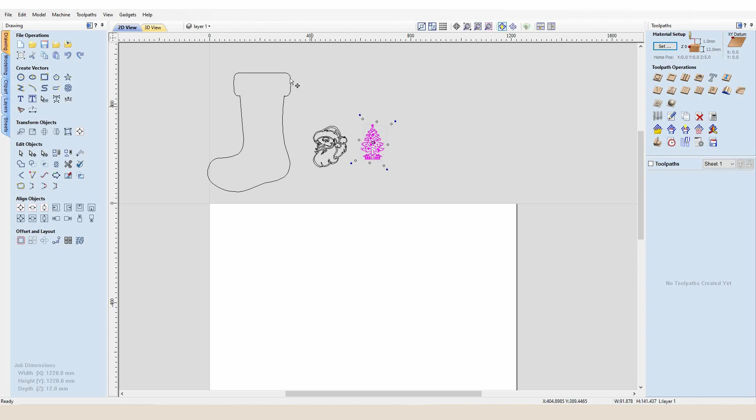So as we open the file here, I've got some vectors that we intend to use today. So I'm just going to spend a second and bring those in. Okay, so these are the three vectors that we're going to be working from. So the first vector is a Christmas boot shape. So if I bring this down here, now the first thing we're going to do is hold Control on the keyboard and press C followed by V. And we're going to copy and paste that across to there. And one will form as the front. And as I just mirror this object horizontally, one will then function as the back.

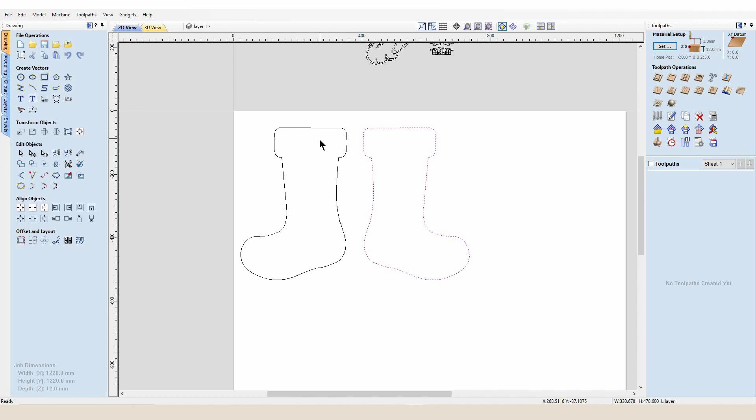Okay, so I'm going to add a nice line vector across here. And we'll quickly form then our first tool path. So if I select this vector here to make our first tool path, what we're going to have is a 2 millimeter deep V-groove line, and we're going to choose a 60-degree bit for that just to give us a nice fine crisp line, and we're going to cut just on the line itself. And as you can see, once our boot is finished, that's going to give us that little detail to divide between the top cushion part and the boot itself.

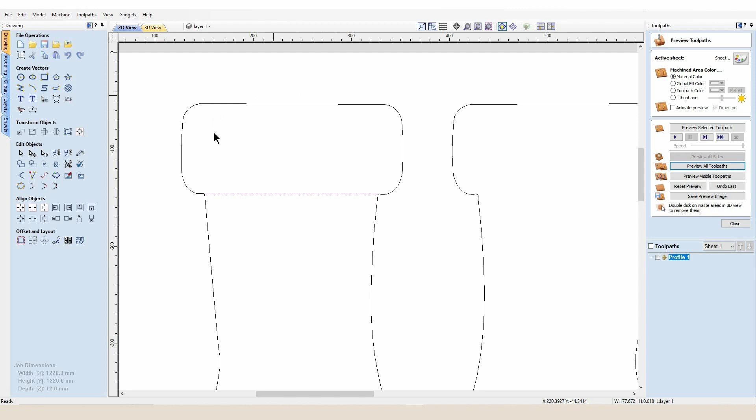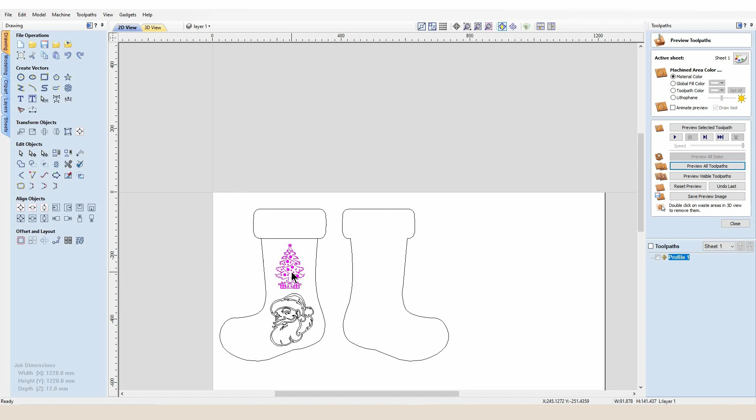Okay, so the next thing we're going to look at is our Happy Santa face. If I bring this one down here, we're going to position this approximately here on our boot, and then I'm going to bring this happy little Christmas tree down, and again, we're just going to spend a little bit of time orientating these to get them exactly where we want them. And that looks to be quite well centered. I would just like to tweak that over a little bit so it runs in line with the boot itself. Okay, so that's the front aspect of our boot.

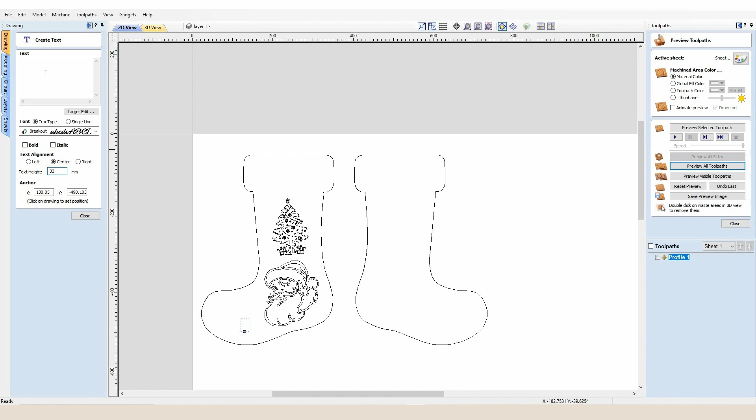I'm going to quickly add some font to this, and we're here already on Breakout, which is one of my favorite fonts. We're going to go a text height of 33 millimeters, and we're going to say Merry and then Christmas. Okay, so I'm going to bring that up and centralize it over the top of our stocking. And again, what I'm looking at is this line down here and this line down here to make sure we're somewhere near parallel to both those lines. So that's not too bad.

And again, just to make this into a finished text shape, if we come over here to our weld selected vectors option, and if we press that and replace those, we've done away with all those small inside vectors overlapping, which sometimes can cause issues when you're trying to run your tool paths. So just going to spend a second and tweak this little tree up a little bit. There we go. I'm quite happy with the orientation on that.

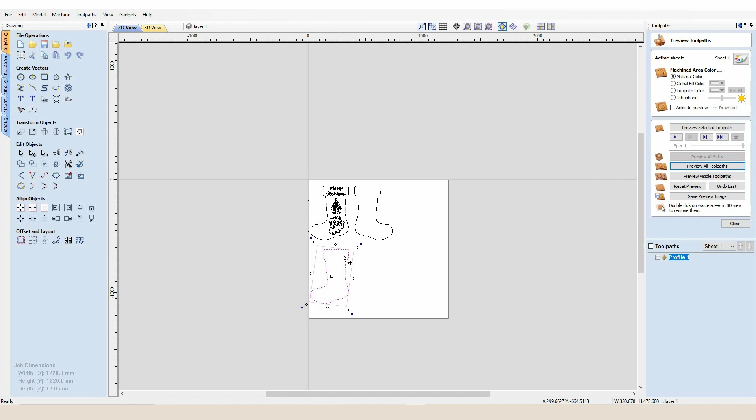So what we're going to do now is move on, and we're going to build some inner parts to this boot, which is effectively going to create a cavity for you to fill with all those nice sweets. So if I just pinch this outside vector and hold Control, press C and then V, we've made another carbon copy. And I'm going to bring that down here over to our stock, and I'm going to add an offset boundary on the inside. I would like my offset boundary to be 20 millimeters, and we're going to go inwards, and that is perfect.

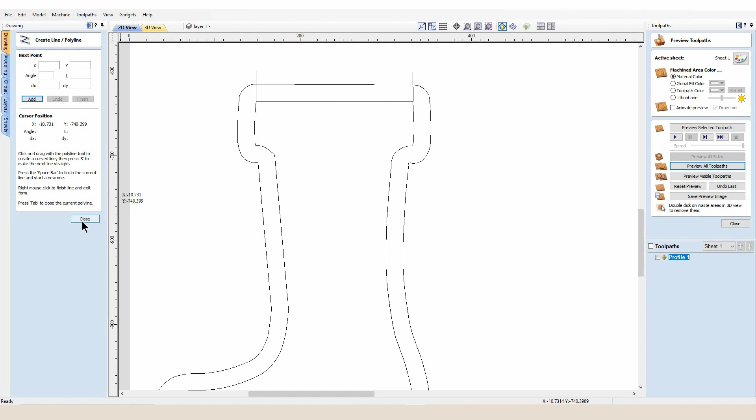Okay, from this step here, I'm going to draw a straight line, and I'm going to pick up this vector here, and we'll drop it there. Press space to start a new line. We're going to start from this corner here, and we're going to work our way upwards. Remember again, press space. So we use the magic scissors now, and we're going to snip the internal away. So I'm just going to make sure our lines are correctly orientated over our project. And as you can see, the Smart Snap features are asking it to move into some funny locations. So that should be enough there.

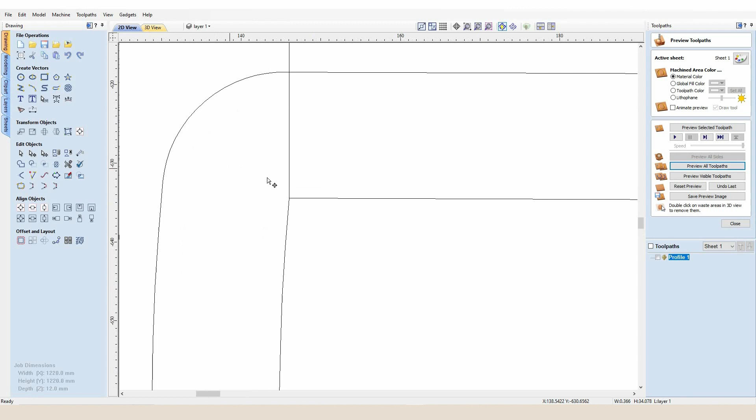We'll just double check this vector. That looks pretty good. So now if we get our magic scissors, we can snip this line, and then we can snip the remnants of these two lines away. And what we've got now is a template for the inside cavity. So our stock for this project being 12 mil, we're going to simply make another 2 of these. Okay, so that's all the main body parts for our stocking.

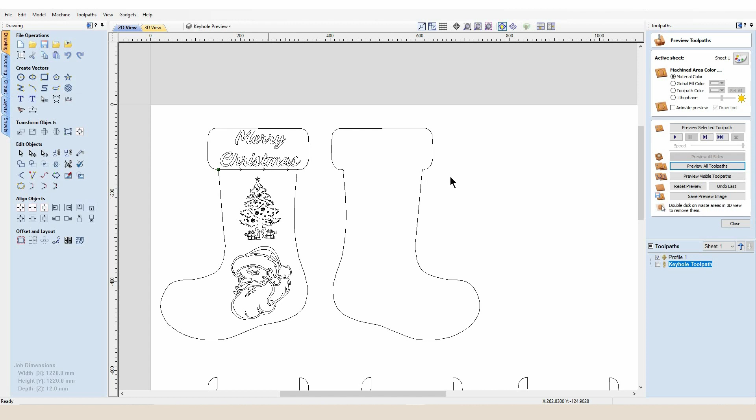Okay, so next thing we're going to do is we're going to add a T-slot then to hang our stocking on the wall. So I'm going to come over here and I'm going to add a 4.5mm circle, and this is going to form the start location for our T-slot. So if I come up to the top line here and click on the gadgets, remember these gadgets are free of charge to download from the Vectric website.

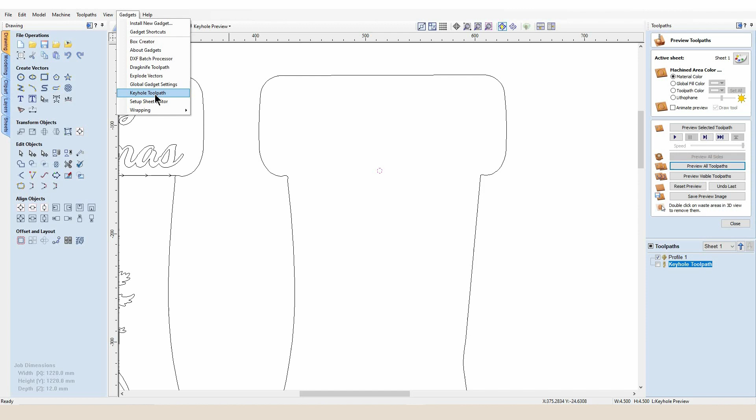And I'm going to click on the keyhole toolpath. And because I've already ran one of these, it's already going to pre-populate our information. So we've got a slot depth of 9mm, a slot length of 25mm, and our entry hole is going to be 9.5mm, and the slot diameter is 3.5mm. So I'm going to make sure I've got the correct tool selected, which is the Trend C120 keyhole cutter.

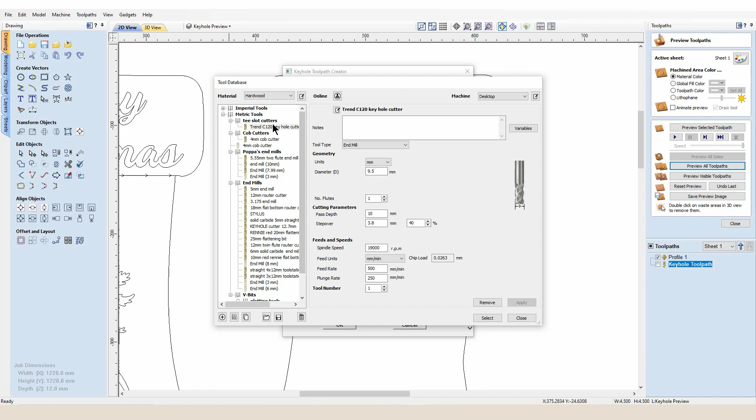And if I press OK, we can see now that that has promoted our toolpath to start from the center of our hole here. So we can go ahead and delete this one which I inputted incorrectly. Now if I come over to our 3D view, what we should see now is the preview of our T-slot. Now this won't show correctly on the preview, but effectively our T-slot cutter is going to start down in this location here, then it's going to move up, and then it's going to move back down again before coming back out of the material.

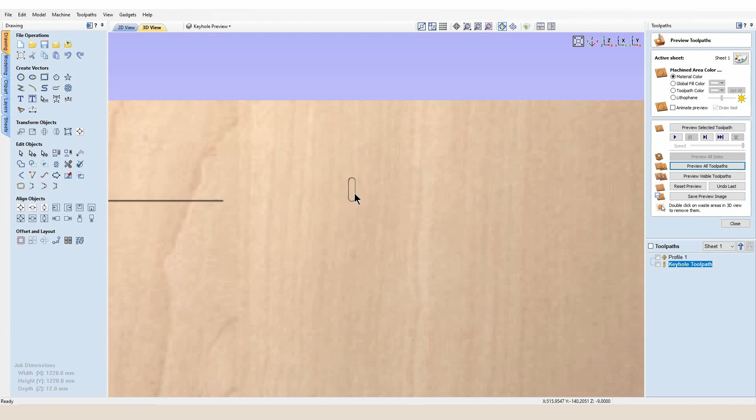So next thing to look at is to make some VCarve passes to create all of this lovely detail. So I'm going to go ahead and group some of this stuff just to make it easier when selecting our toolpaths. So now it's grouped, I press once and I've selected all of our text together. The tree and the Santa Claus face are already pre-grouped, so that's fantastic.

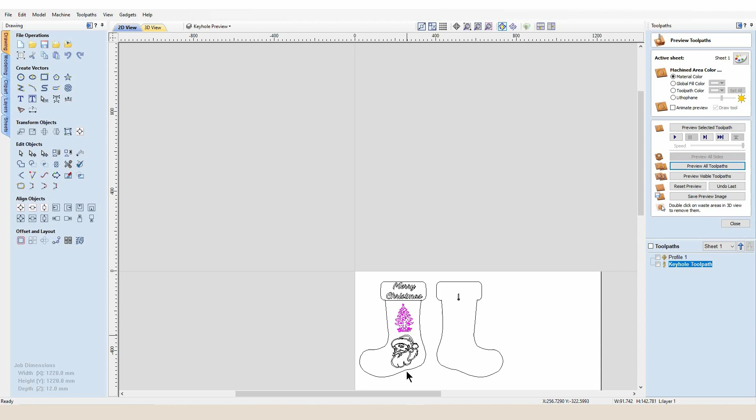So what we're going to do is we are going to click on the Merry Christmas, and that'll be the first VCarve toolpath. I'm going to run that as a 5mm deep flat bottom, and we're going to select a 60-degree V-bit. I will hit calculate. There we go. Next, we're going to select the Santa face, and I'm going to run that then as a separate VCarve, but that will only be 3mm deep.

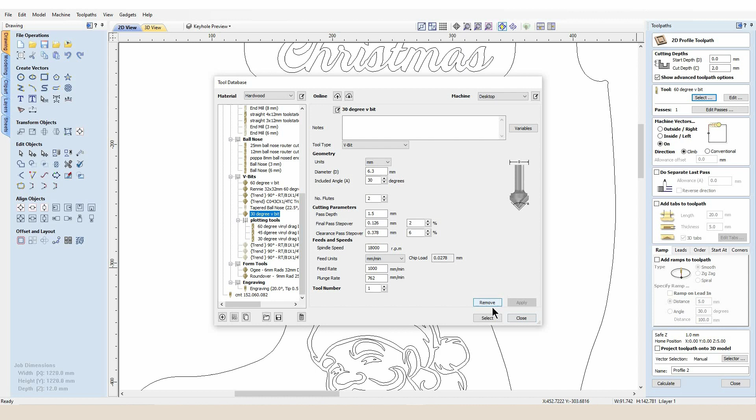There we go. And lastly, because these are such fine small vectors, if I ask it to VCarve, we're going to be churning out lots and lots of detail out of here. So an alternative way to do this is more of an engrave toolpath. So we're going to go to a 2D profile toolpath, and again, cut on the line. We're going to come down here and we're going to select a 30-degree V-bit. And we're going to cut that as a 1.5mm deep engrave. So remember that's cutting on all the available lines. So that's going to look very, very smart.

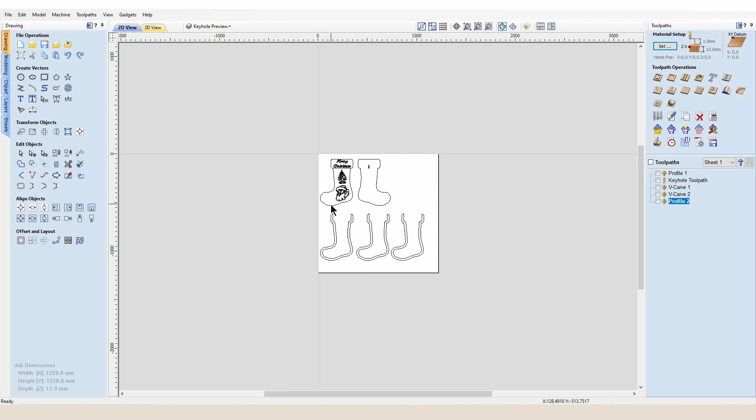Okay, so now that lovely engrave is done, the last thing to do now is to cut our outer profile. So we're going to hold shift on the keypad and using the left mouse button, select all of our different vector shapes. We're going to come over here to our toolpath operations and select profile toolpath. So starting from the top, we're going to cut 13mm into our 12mm stock. We're going to select the correct tool, which will be a 6mm solid carbide end mill. And we're going to cut outside of our vector boundaries.

We'll do a final separate last pass at 0.01mm just to clean up all of those edges. And we're going to add some tabs, which will be 20mm by 6mm, and they're going to be 3D tabs. So that's all of our tabs now input onto there. And instead of using ramps, again, we're going to use leads. We're going to lead in and out by 45 degrees, and we'll cut our lead length down to 6mm. That'll be ample for what we need here. And we're just going to have a look at our start location. So all of our start and finish paths are going to be down here on the bottom of our vector.

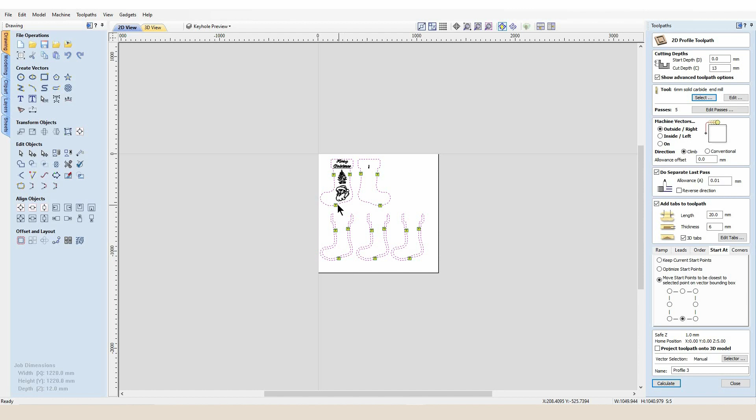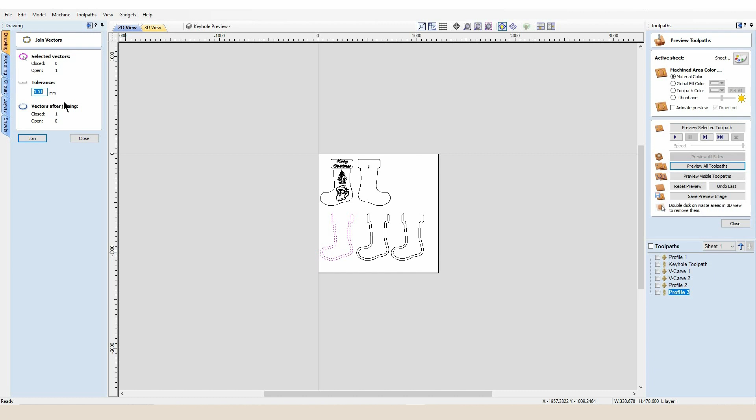Okay, so that's only picked up on these two vectors up here. So it's telling me that there's a fault with these vectors. So if I go into Vector Validator, again, I'm not showing any issues with these, and it says that we've got a closed vector. So I'm not 100% sure why it would not be picking up on these. So I'm just going to play around with this toolpath then, see if I can get it to recognize these last vectors.

Okay, so it seems that while we've been cutting and splicing these vectors around, if I highlight this one and show you, we're going to need to join these open vectors by moving the endpoint to a common point. So I've cut and spliced at the top parts of these vectors, so we've obviously created an overlap somewhere. So I'm just going to press this feature here on each of the vectors, and that should get them now recognizing on our

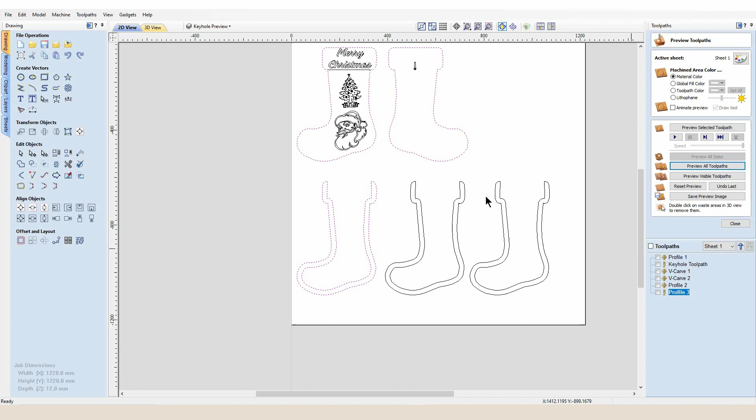toolpath strategy. So we're going to open this back up. We're going to select all of our vectors. And again, it's also lost the tabs off of here, so we'll just go back through and input these tabs. Okay, that's much better. No more warning messages, just telling us that we're going to cut through our material. So that is fantastic.

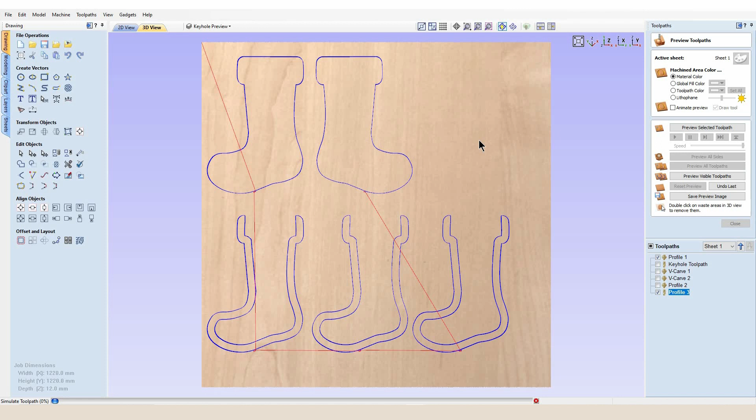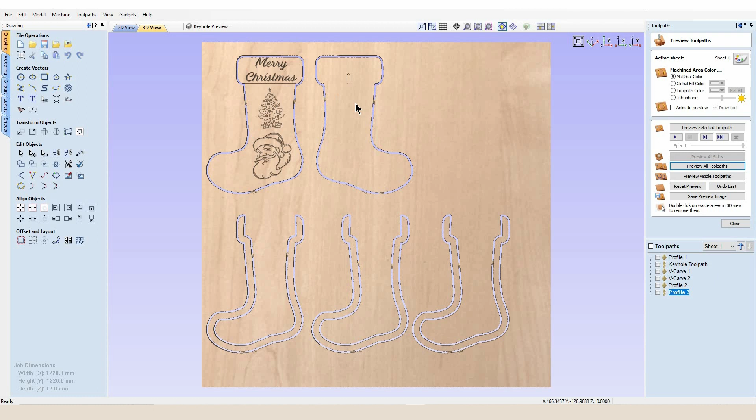Well, there we go. This is all of our parts made out now for our Christmas stocking. So the idea is each of these parts are cut out. These would then be laminated to the back of our stocking. And then finally, this front piece would be laminated to fix it all together. We're going to have a lovely T-slot, so all we need is a simple screw in the wall. You can hang this up and fill it with sweets. So there we have it, guys. That's how we designed our Christmas stocking.